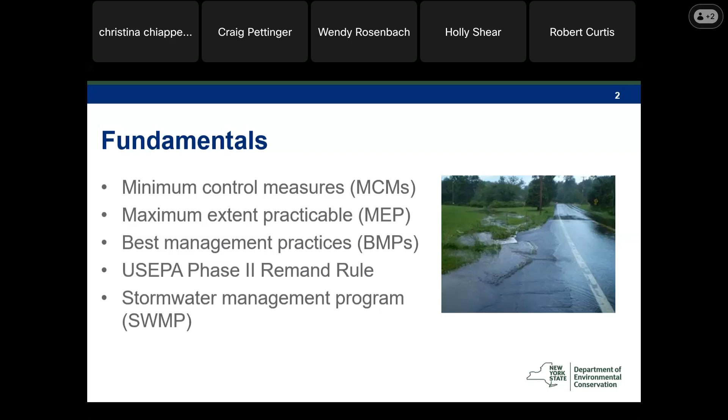I think I note this later, but there's a lot of information also in our responsiveness summary about how we got to where we are and the resources involved for our permit requirements. The stormwater management program developed by the MS4 operators must reflect the applicable requirements for the MCMs contained in the general permit.

A couple of dates I wanted to go over with everyone. You've gotten a few emails from me now, but one of the earlier ones had a list of dates just to keep track of, get everyone up to speed a little quicker, and so that we can start paying attention right off the bat with some compliance deadlines.

So the effective date of the permit, as you all know, was January 3rd, 2024, just a few weeks ago here. The annual reporting year has changed to January 3rd to January 2nd of every year. The electronic notice of intent will be due on February 20th of 2024.

March 4th is when the interim coverage under GP-0-15-003 expires. July 3rd of 2024 is 6 months from the effective date of coverage. I'm noting that because that is one of our earlier compliance dates, and specifically that is when the SWMP plan update is due.

Interim progress certifications are going to be due moving forward with this permit April 1st and October 1st of each year. Your first report that you're going to be sending in for this permit is going to be an interim progress certification, and that's due October 1st of 2024.

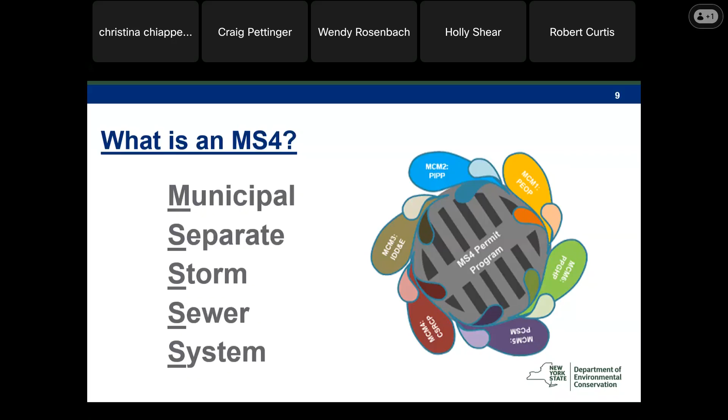The MS4 General Permit authorizes discharges of stormwater from municipal separate storm sewer systems located within designated urbanized areas to surface waters of the state. It includes coverage for automatic and additional designation. Currently, there's over 500 regulated entities, including your cities, towns, villages, counties, statewide agencies, some linear transportation authorities, and institutions. The permit term is 5 years.

For your stormwater management program, or SWAMP, is that what we call it? Yep, SWAMP. Requirements you'll find those under part 4 of the permit.

This is not an all-inclusive list. I just tried to highlight some of the things that I personally felt were important to do. So you are required, the MS4 operator is required to develop and implement and enforce the SWAMP. The SWAMP must be retained in written format, hard copy, or electronic copy, and that's referred to as the Stormwater Management Program Plan. The requirement is to annually update the SWAMP for compliance with the terms and conditions of the permit. Again, this should really not be anything new. We've been doing this all along. Maintain the records of activities completed, such as your trainings and inventories and things within that plan. Develop and maintain an inventory of entities assisting in permit implementation. And that inventory should include the name of the entity helping you, and the permit requirement that is being implemented or performed by that entity.

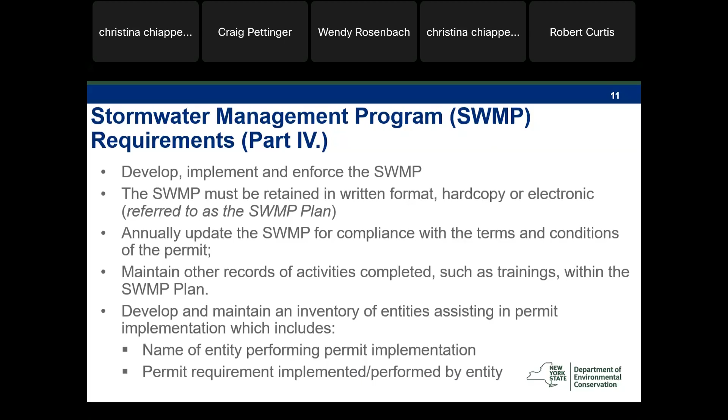Christina touched on this already, but reports must be submitted electronically using the forms located on DEC's website. Again, the annual reports, the reporting period for the annual report is January 3rd of the current year to January 2nd of the following year. And those reports are required to be submitted electronically to the department by April 1st of each year.

The interim progress certifications. So now twice a year, the MS4 operators must electronically submit an interim progress certification, which verifies activities included in this SPDES General Permit that have been completed. Those are required to be submitted to the department on a semi-annual basis. So the reporting period of January 3rd through June 30th, that certification will be submitted by October 1st of each year. And then for the period of July 1st through January 2nd, those need to be submitted by April 1st of each year.

One of the things that you'll notice, hopefully going through the permits, if you have not had an opportunity, is there's been a lot of effort put into standardizing everything. So each minimum control measure you will find is broken into these categories: there's a section on programs, there's an inventory section, prioritizations, and corrective actions. So as you go through the permit, you'll see that under programs, it's going to have your procedures, your training that's been given, documentation of who took the training, and then instructions on updating your procedures. Again, inventory: monitoring locations, construction sites, post-construction stormwater management practices, and municipal facilities, and so on, and corrective actions.

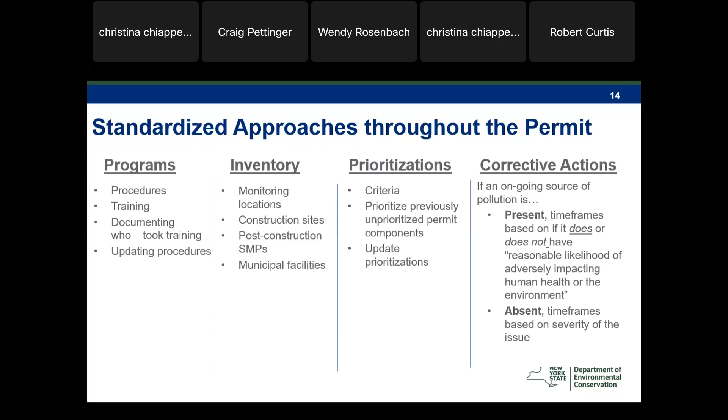So for mapping, mapping is not really a new requirement. It just has been put into a separate section now. So the MS4 operator must develop and maintain a comprehensive mapping system. Within 6 months of the effective date of coverage, the comprehensive system mapping must include your MS4 outfalls, the interconnections, your preliminary storm sewer shed boundaries, the MS4 infrastructure for select TMDLs, if that's applicable, and a base map.

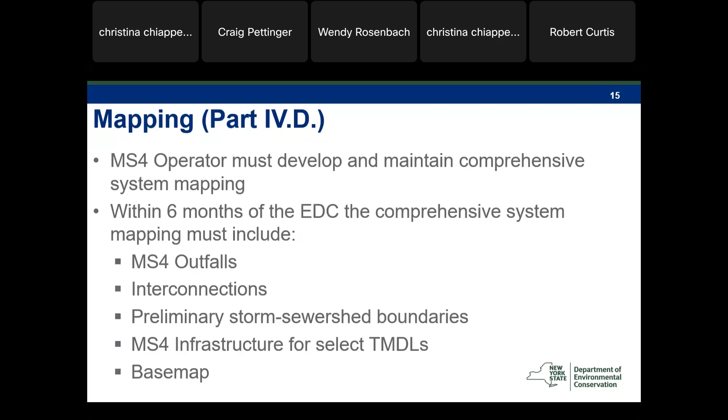The base map has required information.

It's going to include your automatic and additionally designated areas of the MS4, the names and location of all surface waters, and that's going to include your water body classification, the water body inventory, priority water bodies list if applicable, and that information will include the impairment status and what that pollutant of concern is for that water body. And if applicable as well, if you are in a TMDL watershed area, those should be included on the base map where that watershed is.

Your base map will also include your land use, your roads, and topography.

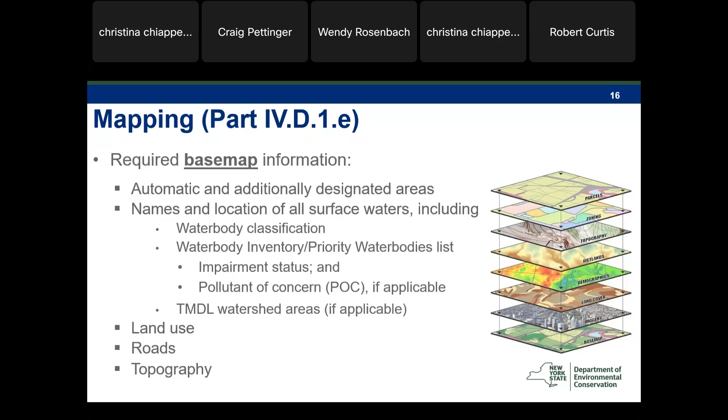So within the first 3 years of effective date of coverage, you should have the location of all monitoring locations. This is a requirement, location of all monitoring locations with prioritization, the focus areas, publicly owned post-construction stormwater management practices, and municipal facilities. The next phase of mapping is due within 5 years of the effective date of coverage.

That will include your MS4 infrastructure information, the conveyance, the type and direction of flow, the stormwater structures, the type and number of connections, and privately owned and operated post-construction stormwater management practices which discharge to the MS4.

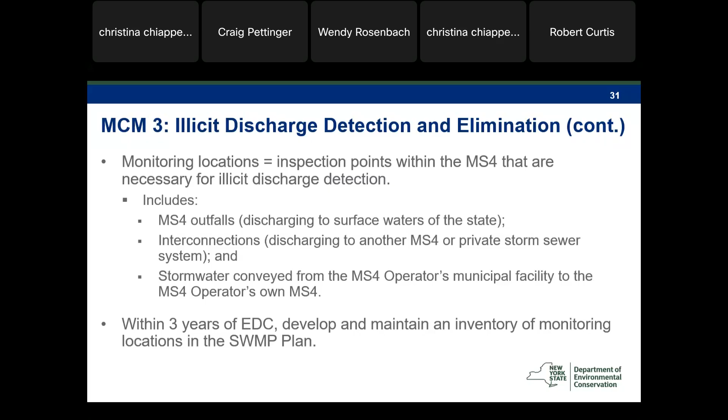Monitoring locations, again, like I said previously, we include priorities for these things. So a high priority monitoring location would be at a high priority municipal facility, discharging to an impaired waters, discharging within a TMDL watershed, discharging to water with designated best usage of primary and secondary contact recreation or higher, and high priority areas also confirm citizen complaints on 3 or more occasions in the previous 12 months. This prioritization needs to be updated annually in your Stormwater Management Program plan.

The MS4 operator must also develop and implement a monitoring locations inspection and sampling program, and this needs to be done within 2 years of that effective date of coverage. So that includes, under that program, it must include inspection of monitoring locations once every 5 years, regardless of prioritization. So if it's a high priority site or a low priority site, they still at least once every 5 years must be inspected.

Sample monitoring locations that are characterized as suspect or obvious illicit discharge. Initiate track down procedures for monitoring locations characterized as suspect or obvious illicit discharge. And with those, within 30 days, re-inspect those monitoring locations with the physical indicators not related to flow.

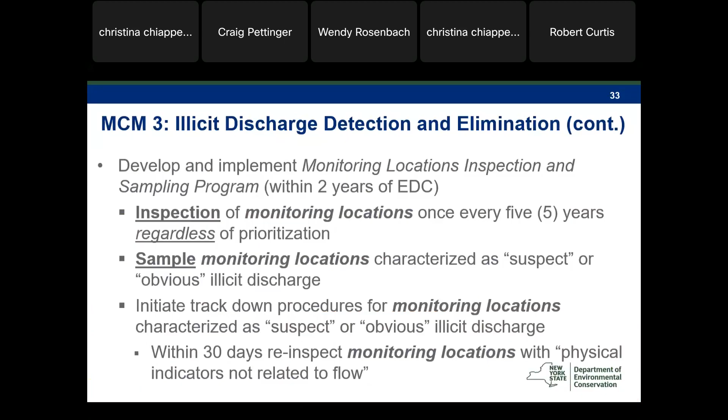Let me back up to reiterate what Christina just referenced: all of this terminology correlates with the Center for Watershed Protection's IDDE guidance manual ORI form. I'd recommend that if you have any questions or need assistance, refer to that IDDE guidance from the Center for Watershed Protection. And before I get the question, that is the most current version of that document.

So under Minimum Control Measure 3, develop and implement an illicit discharge track down program, which needs to be done within 2 years of the effective date of coverage. The procedures for that are described in Chapter 13 of that Center for Watershed IDDE guidance manual. That track down program needs to include corrective actions to be taken.

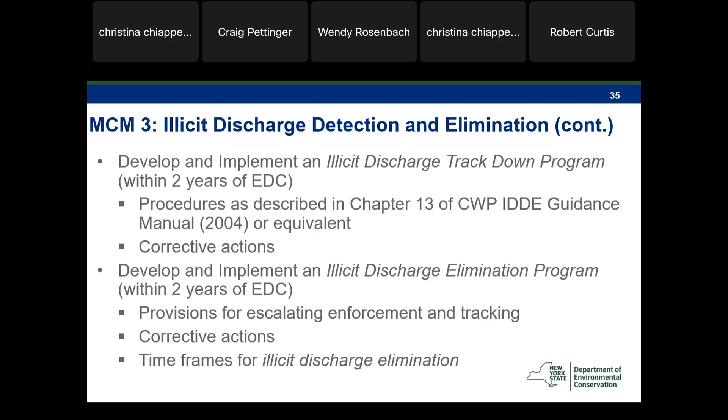And then the next bullet: develop and implement an illicit discharge elimination program within 2 years of the effective date of coverage. That program will include provisions for escalating enforcement and tracking, corrective actions to be taken, and timeframes for illicit discharge elimination.

We have some moments for questions and answers.

I did want to say one thing, just some background on MCM3. You'll notice now it's broken out, as Kathy mentioned—we have programs throughout the permit. The programs follow the same scheme each time they show up: there are procedures that you develop, you train on your procedures, you write down who took the training, and then you update your procedures as necessary. If you change who's doing what, or what you're doing in your procedures, you want to update your procedures accordingly. There are 3 programs in MCM3.

Monitoring locations, inspection and sampling, the track down program, and the elimination program. It's a little odd that it's broken into 3 programs; however, it is not always the same person going out and doing the inspections as the person doing the elimination or some of the enforcement things. This provides a little flexibility. Of course, we could have distilled it down into one program, leaving it up to the MS4 operator to determine who's doing what. We went this route for this iteration of the permit—this is progress, not perfection. So we can talk about your disdain perhaps for my formatting, but that is the point behind having it as 3 distinct programs—because maybe you have different people doing different things.

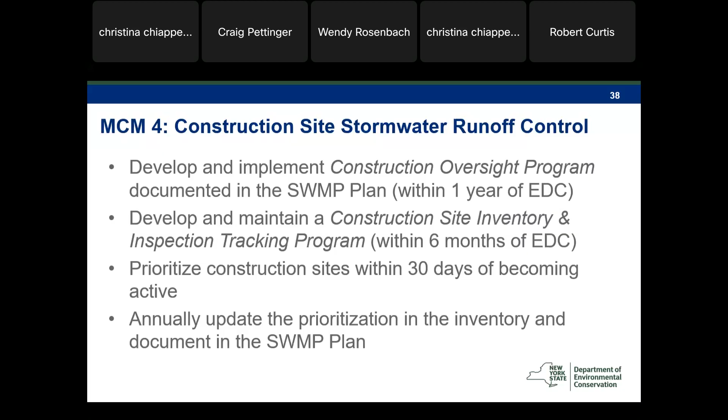When we talk about prioritizing all construction sites, that prioritization needs to be done within 1 year of the effective date of coverage. High priority construction sites include those with a direct conveyance to water bodies specified in the permit, sites with earth disturbance within 100 feet of any lake or pond, within 50 feet of any rivers or streams whether perennial or seasonal, and construction sites with greater than 5 acres of disturbed earth at any one time.

If your construction sites do not fall into that category, they are considered low priority.

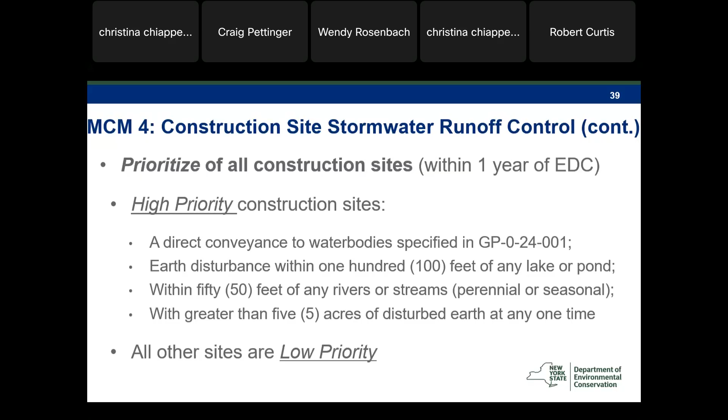For SWPPP review, the MS4 operator needs to provide training for individuals responsible for reviewing the SWPPPs for acceptance. That training is 4 hours of erosion and sediment control training that needs to be done within the first 3 years of the effective date of coverage, and then every 3 years after that point in time.

There is a requirement for a pre-construction meeting, held prior to commencement of construction activities. The owner operator listed on the NOI for that site needs to be present, along with the MS4 operator, the contractor or contractors responsible for implementing the SWPPP for the construction activity, and the qualified inspector.

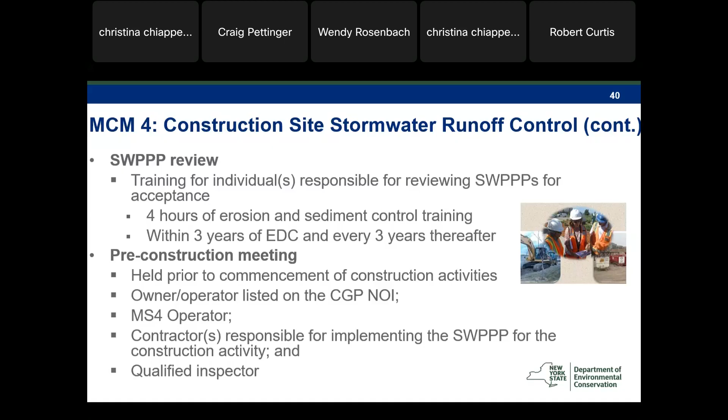For construction site inspections, there needs to be training for individuals responsible for construction site inspections every 3 years, that same erosion and sediment control training, and then annual inspections of all construction sites.

For construction site closeout, the MS4 operator needs to ensure that a final construction site inspection is conducted and documented, and the notice of termination must be signed by the MS4 operator.

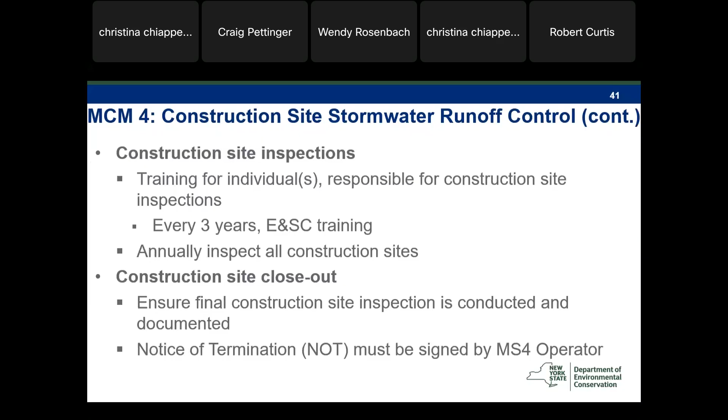And minimum control measure 5, post-construction stormwater management.

This includes both publicly and privately owned and operated post-construction stormwater management practices, those installed as part of any construction general permit covered site or individual SPDES permit since 2003, and all new post-construction stormwater management practices constructed as part of the construction site stormwater runoff control program.

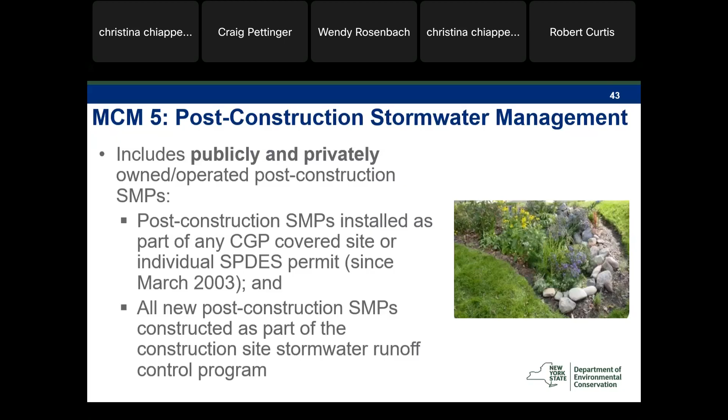Your post-construction stormwater management practice inventory and inspection tracking needs to be completed within 5 years of the effective date of coverage.

Within 1 year of that effective date of coverage, the operator must develop and implement a post-construction stormwater management practice inspection and maintenance program. That program needs to include operation and maintenance of post-construction stormwater management practices, documentation of inspections, and provision to initiate follow-up actions within 30 days of inspection.

So if there is a problem with that stormwater management practice, you notify the operator of the practice and give them time to correct it. That program also needs to include provisions to initiate enforcement if follow-up actions are not complete, which needs to happen within 60 days of inspection.

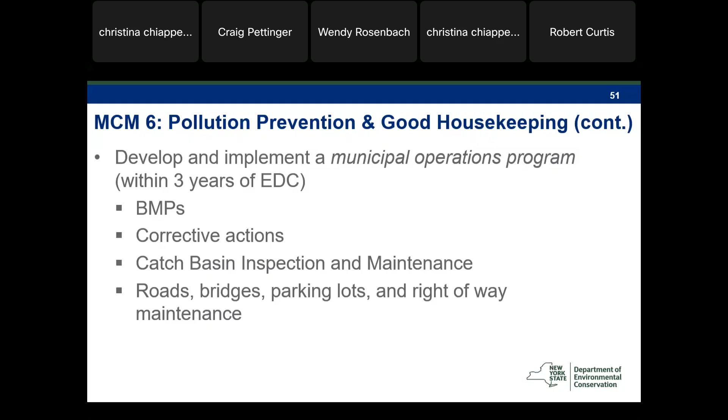So for catch basin inspection and maintenance, there is a 4-step approach now. Identify when an inspection is necessary, inventory the inspection with 5 pieces of information: the date, the depth of the structure, the depth of sump, the approximate level of trash, sediment, or other debris, and date of clean out. Based on the results of the inspection, clean out catch basins.

Not required to clean out catch basin if it's operating properly and there is no trash, sediment, and/or debris in the catch basin, or the sump depth of the catch basin is less than or equal to 2 feet.

As part of that catch basin inspection and maintenance program, the 4th step is manage the material and/or water removed from the catch basin so it doesn't re-enter the MS4 or surface waters of the state. Leave anything else? Nope, that's right.

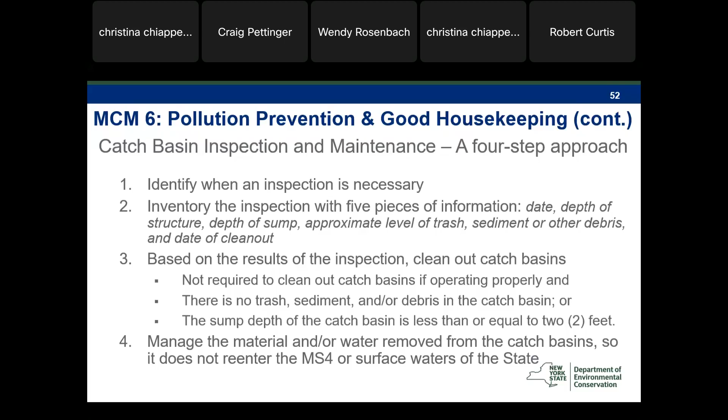Questions and answers. That was great. Thank you.

MCM6 is kind of a beast. As Kathy mentioned, she didn't go through all the BMPs. That was one of the bigger comments on the draft from 2016, where we asked the stakeholder work groups to tell us what BMPs they wanted implemented. That is why that list is so robust.

I mentioned before, but I'll say it again, there are a ton of requirements in this permit. If your entity is not doing something or it does not apply to you, please state so in your stormwater management program plan. That is a condition written in our permit. It's in part 4 under the SWMP program. I can get an exact reference in a second, but it is there.

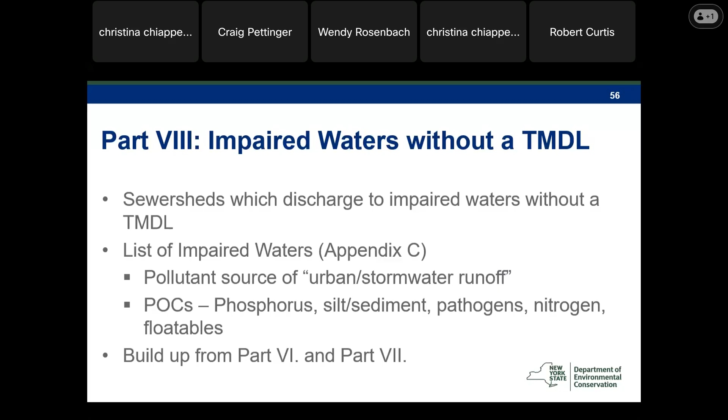The requirements of Part 8 build up off of what is required in either Part 6 or Part 7. In this way, it's a true stepwise function of the permit. You are building off of what I sometimes term the base program.

More on impaired waters without a TMDL. I'm not going to go into super nitty-gritty details, but I want to point out a couple of things. For mapping for impaired waters without a TMDL, some of the mapping requirements in Part 8 occur at an expedited time frame compared to that which is required in the Part 4D mapping section. For example, the infrastructure mapping that occurs within 5 years of EDC in Part 4D occurs within 3 years for those subject to Part 8.

I'll repeat again, please make sure you read the permit very carefully and slowly. There are some nuances, and I'm trying to pick those out for you here so that no one gets caught up.

Another question I've gotten recently is, where did ADA MS4 outfalls come from, and why are they a permit requirement? ADA MS4 outfalls are additionally designated area MS4 outfalls. Let me tell you the story of how they came to be. MS4 outfalls, or as they were previously called in GP-0-15-003, only occur in the automatically designated area.

You may remember just a few short weeks ago that all of your outfalls only occurred in that automatically designated area. However, we have criterion 3 of our additional designation criteria, found in Appendix B of the permit if you're interested. That is the extension of implementation of MCMs 4 and 5 to the municipal boundary. So in order to properly implement MCMs 4 and 5, the requirements of MCMs 4 and 5 that are in Part 8, you need to know if the discharge in the additionally designated area based on criterion 3 is going to an impaired water.

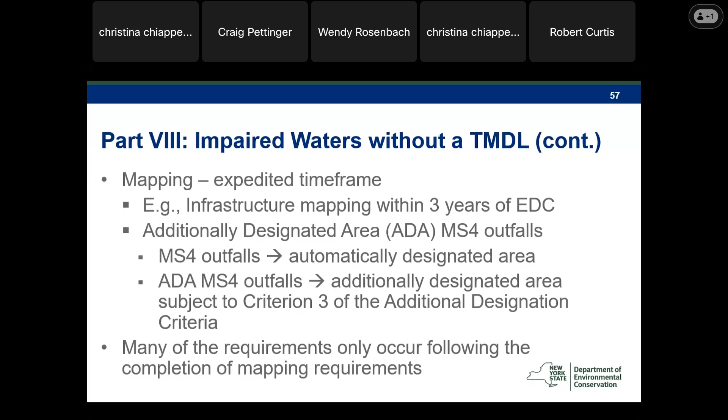So at the top, this is just a quick snip out of the permit, for Part 8A, which is phosphorus. A1 here is mapping. The mapping, for infrastructure mapping, is required within 3 years of EDC. Again, I'll use the citation, so it's Part 8A1. Below here we have the illicit discharge detection and elimination, and it says following the completion of 8A1. So following the completion of your mapping, then do this.

This is specific for MCM3, building up off of your MCM3 program, but you do not have to do this until after your mapping is already complete. And I don't mean complete when you feel like completing it—I mean complete and complying with the permit, which is 3 years after effective date of coverage.

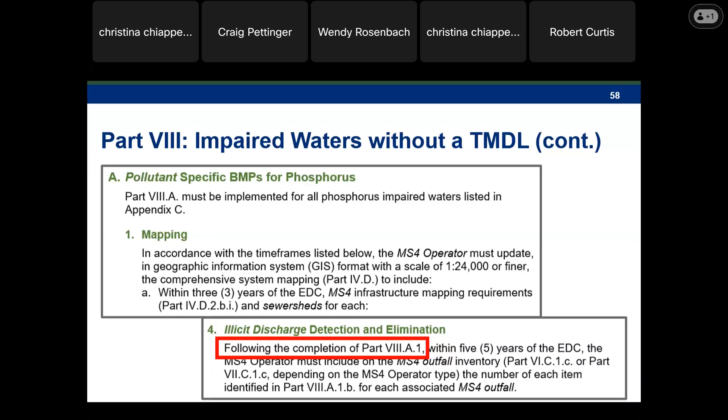The next section I'm going to go into now is about Part 9 requirements, watershed improvement strategies, requirements for TMDL implementation.

Similar to your Part 8 requirements, I'm not going to go into too much of the nitty gritty, but I do want to give a little bit of background on the TMDLs. I have gotten a few questions on TMDLs in general lately, so I want to give a quick overview of this stuff.

TMDL is total maximum daily loads. A TMDL is the calculation of the maximum amount of a pollutant allowed to enter a water body, so the water body will meet and continue to meet water quality standards for a specified pollutant. Watersheds are the delineation of the total drainage area to a nearby water, regardless of any administrative or municipal boundaries. That means a watershed can include multiple municipalities, parts of municipalities, and all of their contributions together. TMDLs are calculated by taking into consideration all of the sources of the pollutant of concern within this watershed. The TMDL determines the pollutant reduction necessary to meet water quality standards and allocates the reductions to all of the contributors of that pollutant.

In the MS4 General Permit, it requires best management practices to be implemented in order to meet the pollutant load reduction for local MS4 operators that are contributing the pollutant in question to the water body, in addition to whatever is required in Part 6 and Part 7. So that was a mouthful, and I'll say it again a little differently. If there is an MS4 operator contribution to a TMDL, that MS4 operator is given a reduction that they need to hit, and that reduction is calculated based on the program they're already implementing in the MS4, based on the MS4 General Permit, the base program, Part 6 or Part 7, depending on the operator type.

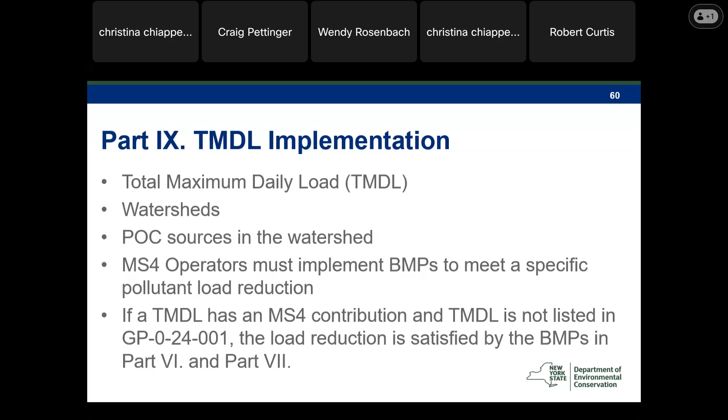There are certain TMDLs that are listed in our permit that are subject to Part 9 requirements. If you are an MS4 operator and you have a contribution to a TMDL, but that TMDL is not listed here, through implementation of your program in Part 6 and 7, you are thereby satisfying your TMDL load reduction. You are only in this list if the load reduction is not satisfied by Part 6 and 7.

This does get a little bit dense. This section starts to get a little bit dense. Again, my goal is to try and help all of you, as well as myself, to work through some of this. These permit requirements have been included for MS4 operators that discharge to waters with an EPA-approved TMDL. I'm not going to go through the specific sections, because each of the TMDLs is written to match a specific impairment in those watershed characteristics. So there is some variation. Yes, there are some similarities, but there's some variation between those. I'm not going to go through that today.

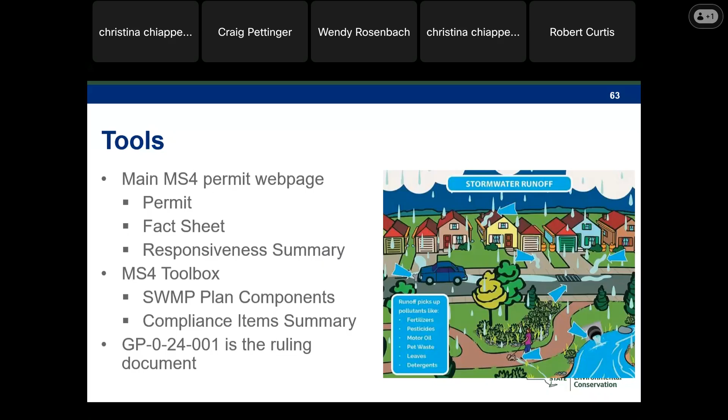The compliance items summary tool is a summarization of all the compliance schedule that is embedded throughout the permit. But the permit is the ruling document. So if there is any inconsistency with the SWMP plan components tool or the compliance item summary tool, please defer to the permit. That said, if you do find an issue, let me know. My goal is to have these tools in the best format so that everyone can use them for implementation. So if there is an error, please let me know. Those were my tools entirely, so I'll take fault for any errors found in them.

As far as grants, I know this was a question earlier. DEC does offer two grants: one is the NPG MS4 mapping grant, and the other is the WQIP vac truck grant. These RFAs come out in May, and the applications are usually due at the end of July. This year, the deadline was pushed just a hair—it's not the norm, so don't expect that. Please anticipate having your applications in by the end of July. The mapping grant, I do expect a lot of applications for in particular, especially now that it's a permit requirement.

You'll notice there are a lot of different things that can be mapped, quote unquote, as part of the mapping grant. We have to walk a fine line with what is grant—above and beyond permit requirements—and what is funding compliance. These above-and-beyond compliance items, it is a grant. They're supposed to be, I'm using the word loosely, fun projects to get really good projects underway, and not just funding compliance. So that's why some of those items are there. You'll notice, however, that it does mirror the requirements of the permit pretty closely.

My tips for grant applications: read the RFA very closely. They change slightly year to year—sometimes what was required one year was not required the year before, and vice versa. Please make sure that all the documents required to be attached are actually attached. That's one of the biggest problems—some of these minor items that just need to be there to check a box aren't there, and the projects become ineligible.